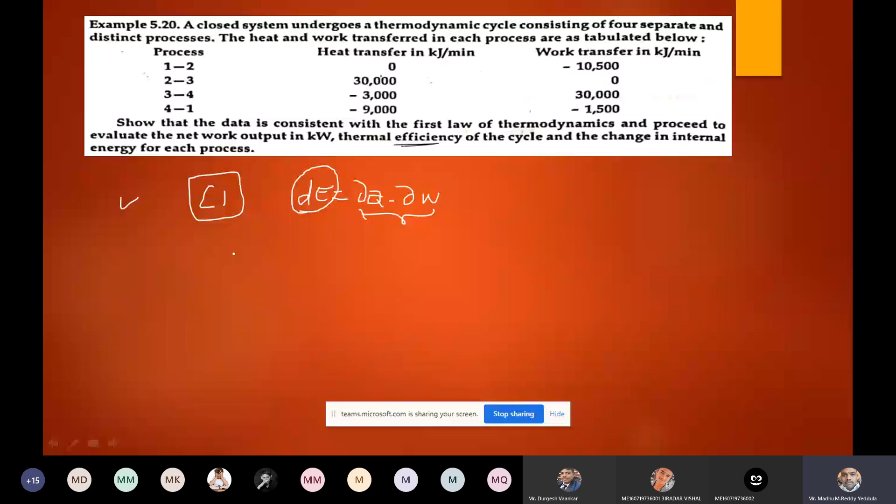Corollary two discusses isolated system. For isolated system, the change in energy dE is equal to 0. Nothing but energy is always constant, right? So for isolated system, there is no heat interaction and work interaction. Therefore, in the absence of heat and work, the net energy is always 0. The difference of energy, nothing but energy is always constant. That is corollary two we discussed.

Corollary three discusses perpetual motion machine of first kind, PMM1. It is a hypothetical machine. So what it states is, let us consider an engine. The input we are giving is 0, but I am getting output. Or there exists the same machine or engine where we are giving input, but output is 0. So this engine or machine violates first law of thermodynamics. Therefore, PMM1 is highly impossible.

In this case, it is an energy producing device. In this case, it is an energy consuming device. Therefore, we cannot.

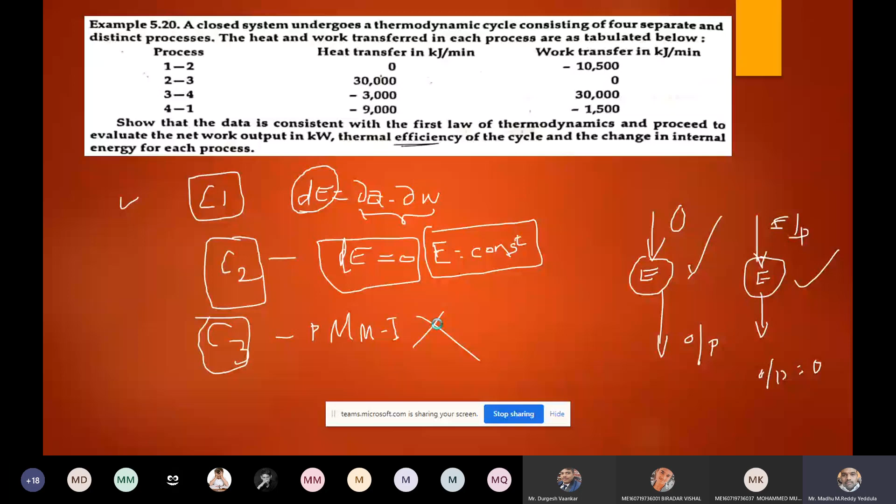So according to first law of thermodynamics, it is not possible to create energy or destroy energy. Therefore, PMM1 is a hypothetical machine, PMM1 is not possible. After that, we discussed two problems on the first law of thermodynamics.

After that, we discussed about stored energy. Stored energy is a property of a system. If you see in the figure, the system follows 1A2, and return it follows 2B1, 2C1, and 2D1. Irrespective of the path followed, again the system regains its original state, meaning the energy is independent of the path followed. It depends only on the end states. That is the reason energy is a property of a system.

Whatever energy it may be, the cyclic integral of energy, the cyclic integral of change in energy, is always 0. Cyclic integral of any property is nothing but a point function. All point functions are properties of the system. If a system undergoes a cyclic process, the cyclic integral of any property will be 0, including the cyclic integral of change in energy.

What is energy? Energy may be internal energy, kinetic energy, or potential energy. In the absence of kinetic energy and potential energy, our energy is equal to the internal energy. Almost all problems, wherever dE is there, I will simply replace with dU. That's what we discussed in the last class, right?

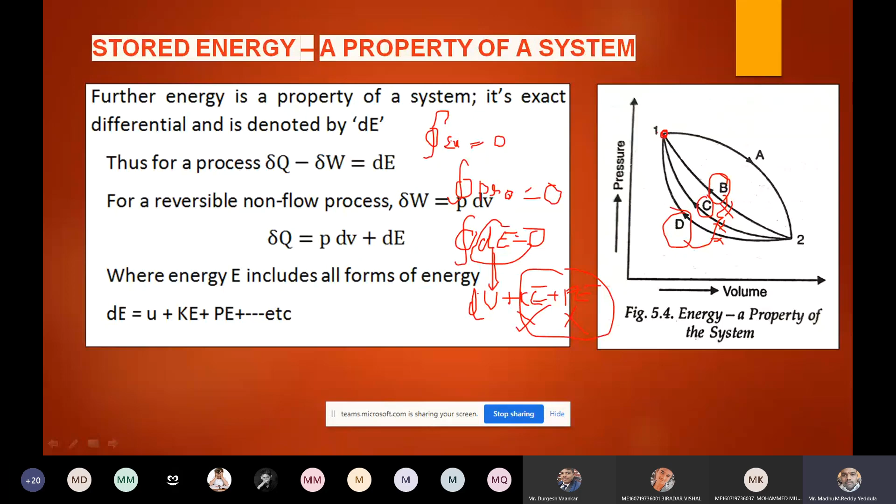Now, and we solved two problems over there.

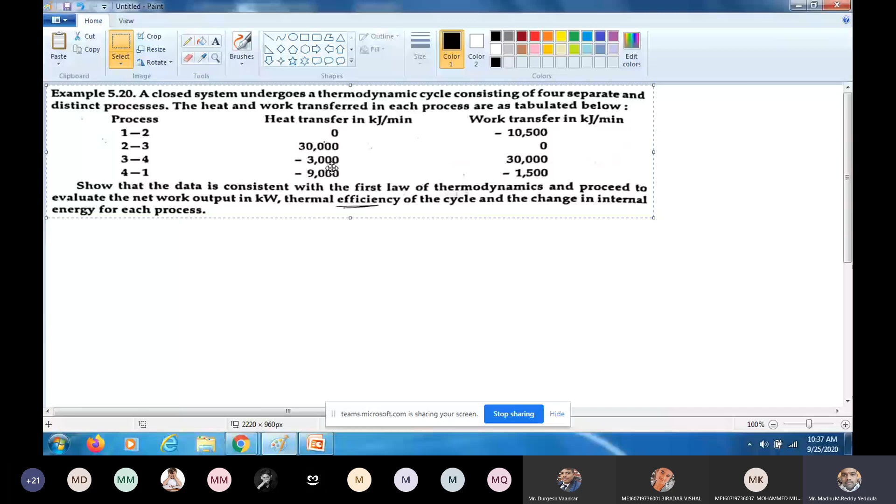A closed system undergoes a thermodynamic cycle consisting of 4 processes: process 1 to 2, 2 to 3, 3 to 4, 4 to 1. Let us assume it reaches its original state again through 1 to 2, 2 to 3, 3 to 4, 4 to 1. It is a cyclic process because again the initial state is restored. Let us assume this is P and this is V. Just for understanding sake, I've drawn the cyclic figure.

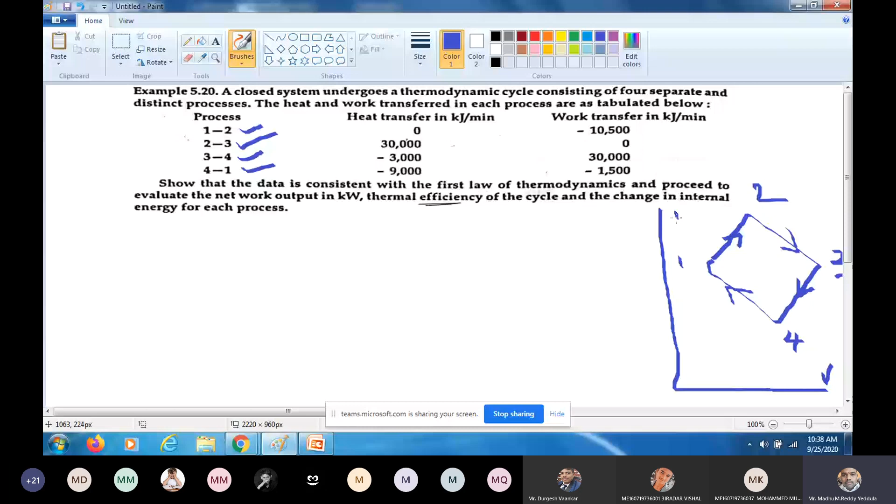So during 1 to 2, what is the heat transfer? During 1 to 2, heat transfer is 0, no heat is added to the system, and work transfer is minus 10,500. What is the meaning of minus 10,500? Can anyone please tell me? What is the meaning of negative sign in work transfer?

Can anyone tell, work done on the system? Yeah, work is done on the system, right? That is 1 to 2.

Now coming 2 to 3, during 2 to 3, the heat added is 30,000. It is positive, therefore 2 to 3, heat is added, and work done will be 0.

There is no work done, right? And 1 to 2, heat is nothing there, but work is done on the system because we got negative W.

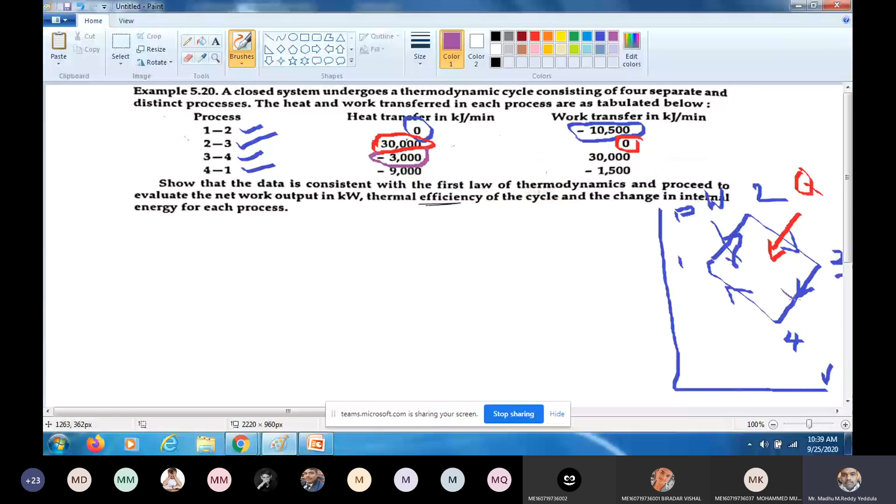Okay, now next, 3 to 4, heat is minus 3000, means heat is rejected from the system, right? So 3 to 4, heat rejected from the system because it is negative sign, and work is positive. Work is positive means work is done by the system. 3 to 4, work is done by the system.

Now coming to the fourth one, the heat is negative. Heat is negative means heat is rejected from the system. Q is negative and work is negative. Work is done on the system.

Is this process clear? What is happening - 1 to 2, 2 to 3, 3 to 4, 4 to 1, right? This sign plays a major role. Now we will see the question.

Show that the data is consistent with first law. So what to do in order to check that whether the given data is consistent with first law or not? What is the check we need to do? Tell me anyone, how to check whether the given data is consistent with the first law?

For first law, cyclic integral dou q should be equal to cyclic integral dou w. Agree? Yes or no? In order to satisfy the first law of thermodynamics, we need to check the cyclic integral of dou q should be equal to cyclic integral of dou w.

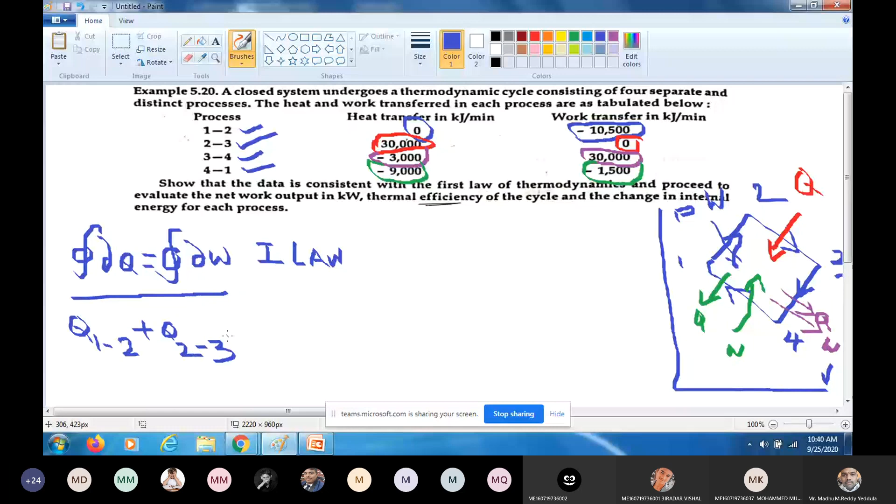Cyclic integral of dou q means q 1 to 2 plus q 2 to 3 plus q 3 to 4 plus q 4 to 1. Tell me, what is this value? Anyone? If you have a calculator, add all the data: 0, 30,000, minus 12, means it will be 18,000.

Positive, agree? Yes or no? It is 18,000 kilojoules per minute. That is the net heat. Clear now? This is cyclic integral dou q.

Now cyclic integral dou w means w 1 to 2 plus w 2 to 3 plus w 3 to 4 plus w 4 to 1. Now tell me, what is the sum of all the work interactions? Minus 12,000 plus 30,000, it is again equal to plus 18,000 kilojoules per minute. So cyclic integral dou q is equal to cyclic integral dou w.

What does it mean? The given data is consistent with the first law. Is it clear till first law? So we can say that the given data is consistent with the first law of thermodynamics. If it is clear, then tell me.

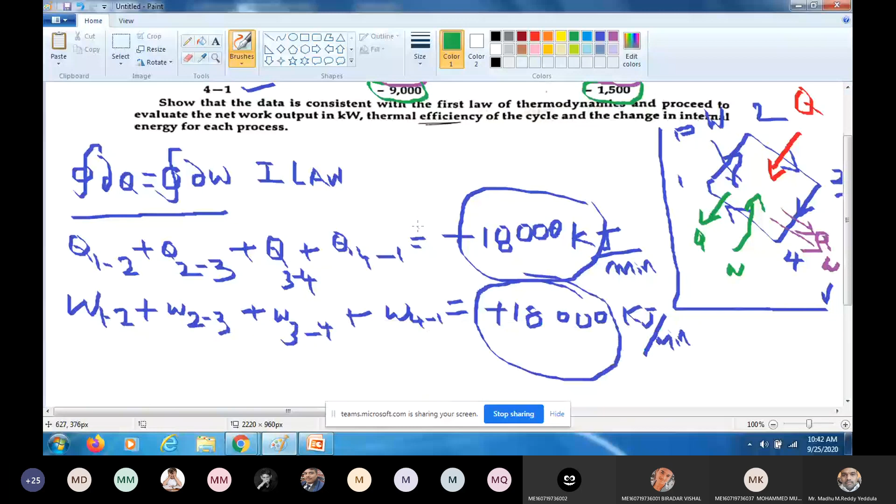Net work means cyclic integral dou w. Cyclic integral dou w, just now I calculated, and this value is positive 18,000 kilojoules per minute.

But I want in terms of what are the units he is asking? He is asking the units in kilowatt, right? So kilojoules per second is equal to kilowatt, right? In order to convert this, multiply. So what you need to do? How to convert kilojoules per minute into kilowatt? Please tell me anyone, hours - we should come to kilojoules per hour.

This is, no, kilojoules per second we require, right? So 1 minute is equal to 60 seconds. Already in the numerator we have kilojoule, right? So joules per second is watt, kilojoules per second is kilowatt. So therefore this value is equal to 300 kilowatt.

Is this conversion clear? How to convert kilojoules per minute into kilowatt, right? Just divide by 60, thereby you will get it in terms of kilowatt. Okay, this one.

This is second bit. Next, third bit, thermal efficiency, right? So thermal efficiency - always for anything, how to calculate efficiency? Not only engine, for any device, how to calculate efficiency? Please answer anyone, how to calculate efficiency of any device?

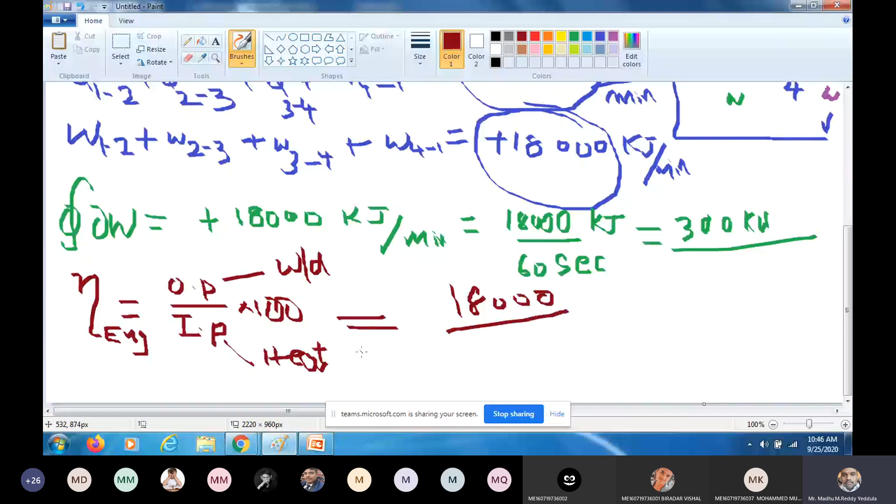Only heat supplied we need. Now how much should I substitute? Tell me heat supplied here. Is it 18,000? Please tell me heat supplied. No, 18,000 is not. That is the net heat.

Net heat is nothing but heat supplied minus heat rejected. Remember, net heat is different, heat supplied is different. Usually, net heat equals Q net equals heat supplied minus heat rejected. But I want only heat supplied. So this 18,000 is the net heat.

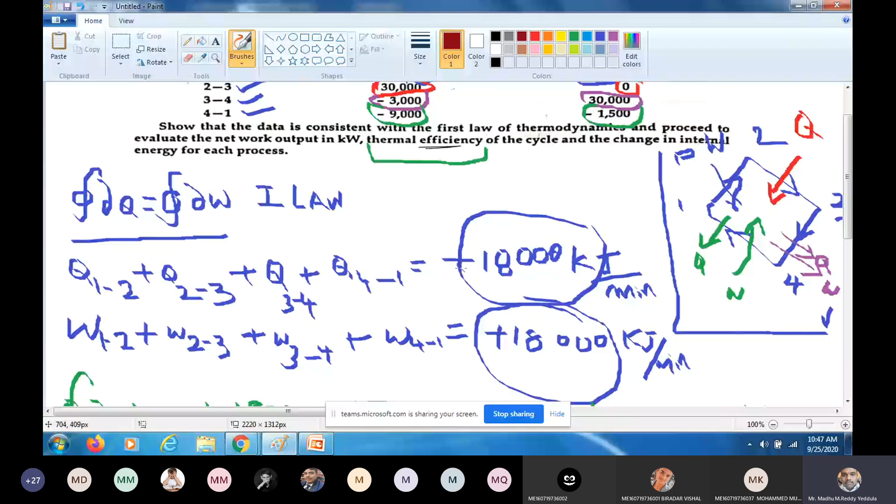This is the cyclic integral dou Q, this is the net heat. In this we have some heat supplied and heat rejected. If the sign is positive, that is the heat supplied. When the sign is negative, that is the heat rejected. So therefore, heat supplied is not 18,000, it's 30,000. 18,000 is the net heat, but positive sign is only for 30,000. That is the heat supplied. So work done will be net work, and heat supplied only heat supplied.

So this will give the efficiency. How much it will be? What is the efficiency here? 18 by 30 into 100. 0.6. 60%, right? 60%. Clear this bit?

So W net by heat supplied, that is the efficiency formula. W net means total work by only heat supplied. Net work by heat supplied gives the efficiency of any heat engine. Efficiency of any heat engine equals W net by heat supply.

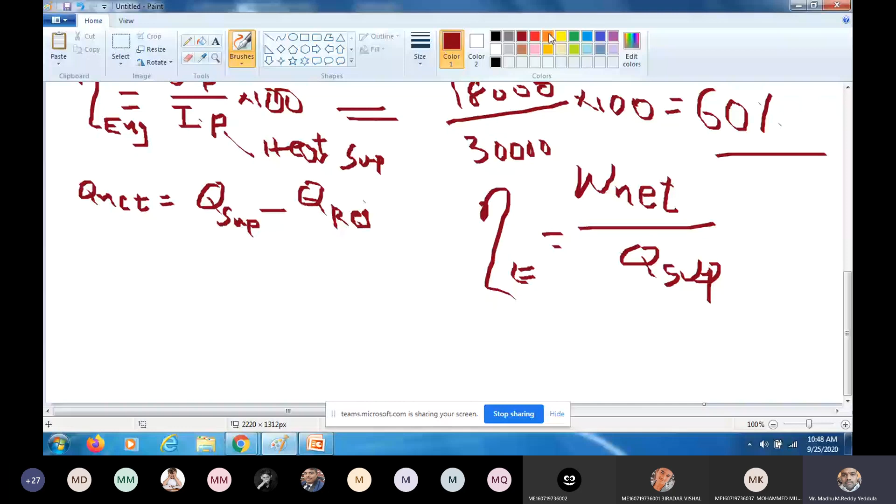Okay, the next part is asking thermal efficiency of the cycle and change in internal energy for each process. Change in internal energy for each process means for process 1 to 2, what is du? 2 to 3, 3 to 4, 4 to 1. So in order to do that, as we know from first law of thermodynamics or corollary, dou Q minus dou W equals du.

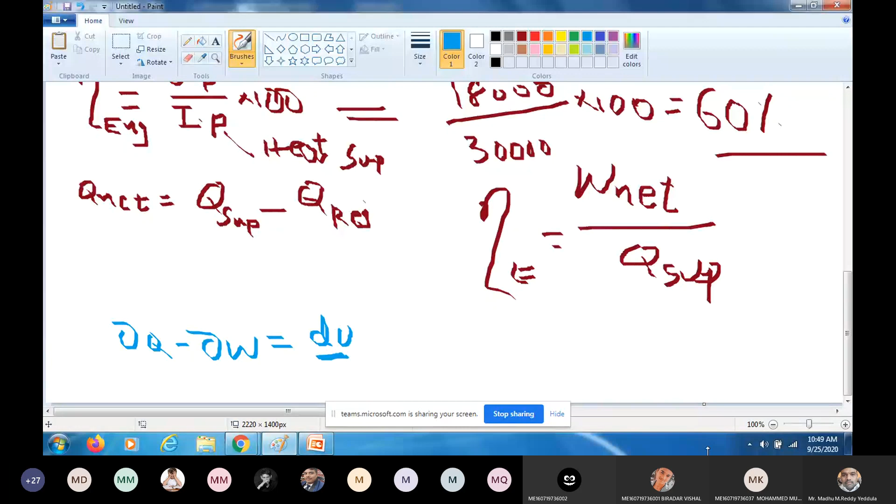Du is a property, also called a point function. Now he is asking du for each process: du 1 to 2, 2 to 3, 3 to 4. So I can say du 1 to 2 equals Q 1 to 2, minus W 1 to 2.

So what is Q1 to 2? Q1 to 2 is 0. W1 to 2 is minus 10,500. 0 minus of minus 10,500, so that equals 10,500 kilojoules per minute. So this is du1 to 2.

In the same way, we can calculate the internal energy during process 2 to 3. Can we do like this? Q2 to 3 minus W2 to 3, just substitute the values. And du3 to 4 and 4 to 1, four processes. Change in internal energy for four things. Du3 to 4 one process, and finally du4 to 1.

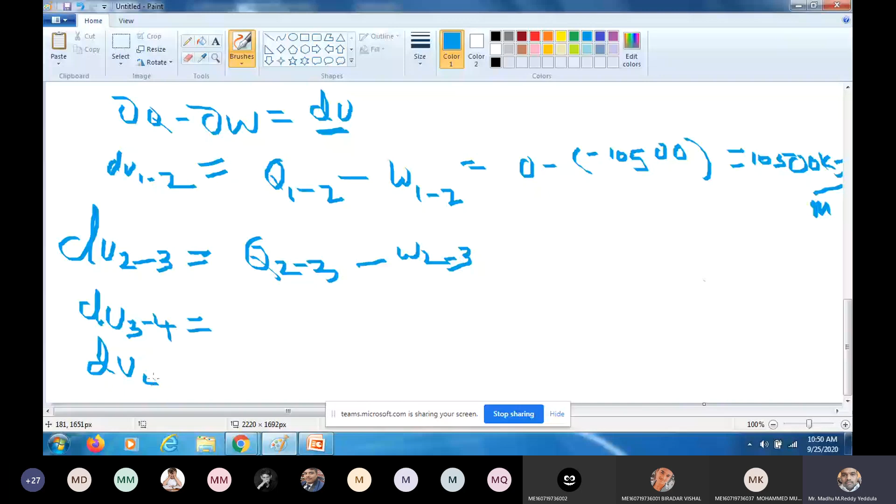Is this problem clear? First, we checked whether the data is consistent with the first law. For that, cyclic integral dou Q should be equal to dou W. We verified it is satisfied. Now, second bit is asking, first law of thermodynamics, proceed to calculate net work. Net work already we calculated, but units are in kilojoules per minute. But he is asking net work in kilowatt, so I need to convert this unit kilojoules per minute into kilowatt.

So for that, if I convert minute to second, kilojoules per second will be kilowatt. 1 minute is equivalent to 60 seconds. Therefore, kilojoules per second is nothing but kilowatt, and that is 300 kilowatt.

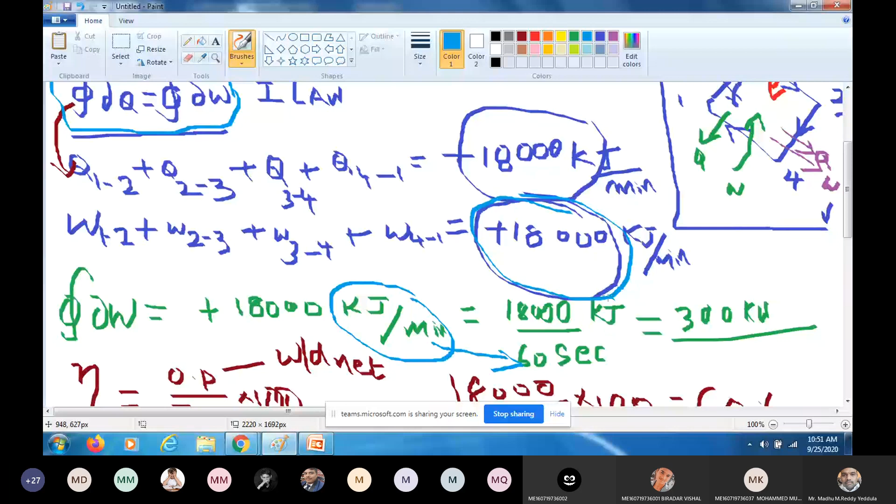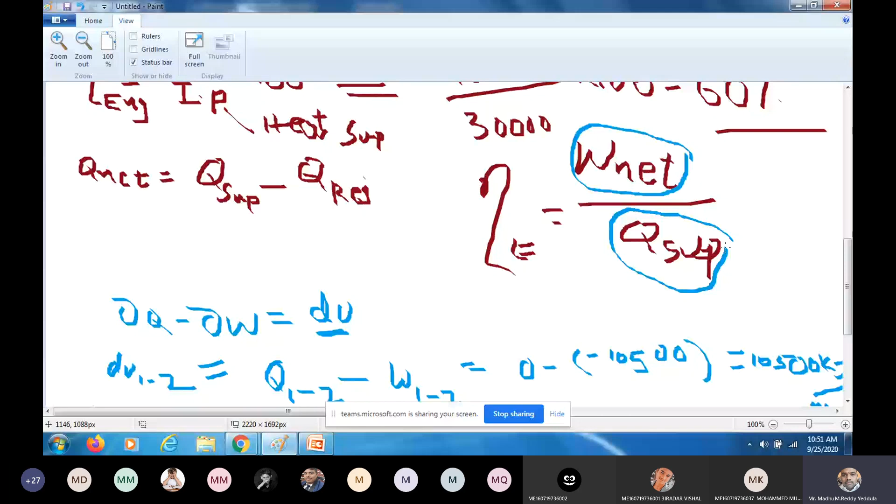Next, he is asking to calculate the thermal efficiency. Efficiency of any engine is equal to output by input, but to calculate thermal efficiency it is net work done by the system to the total heat supplied. Total heat supplied means only the positive sign values in the given problem. According to our sign convention, heat added to the system is positive. So total heat supplied is not 18,000, it is only 30,000 because it has a positive sign. So therefore we got the efficiency.

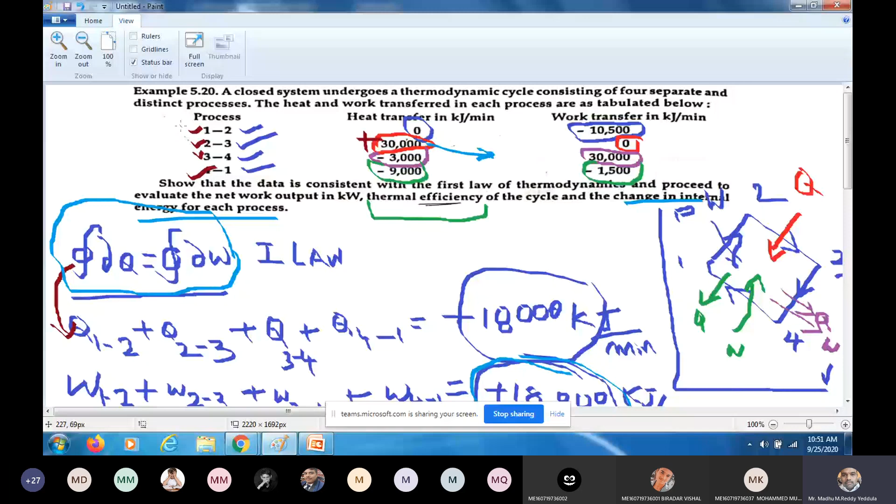Then he is asking for change in internal energy for each process. We have 4 processes, and for each we need to calculate change in internal energy: Du1-2, 2-3, 3-4, 4-1. As we know from the first corollary, there exists a property of a system such that the change in its value during the process is equal to the difference between heat supplied and work done. In the same way, Du1-2 equals Q1-2 minus W1-2, and similarly for 2-3, 3-4, and 4-1. Let me just write the values directly.

For 2-3, this will be 30,000 kilojoules per minute. And Du3-4 equals Q minus W, minus 3,000 minus 30,000, which gives minus 33,000 kilojoules per minute. Last one, Du4-1 equals Q4-1 minus W, minus 9,000 plus 1,500, which is minus 7,500 kilojoules per minute. This is the final answer.

Clear now? Clear or not? Yes, sir. Right, now we'll go to the next problem.

We can see here what I explained will be here, you can go through it quickly. If you have any doubt, you can ask me. Just go through it, verify here also: dQ is equal to dW. Yes, it is verified, according to the first law of thermodynamics. Next, he calculated net work output. This is dQ, and the unit is only the difference. We converted and got 300 kilowatts. Then the thermal efficiency, which is work done by heat supplied, 60%, and Du1-2, 2-3, 3-4.

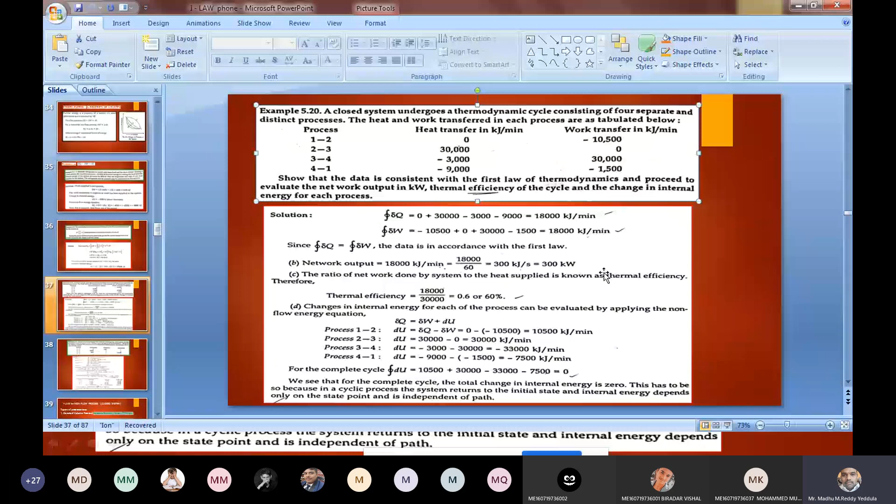Okay, again, I told you the cyclic integral of any property, right, so as I told, cyclic integral of any property. What is this value? Please tell me. Cyclic integral of any property will be 0 for a cyclic process. For a cyclic process, the cyclic integral of its change equals 0. We can check this too: cyclic integral of dU should be 0, then only our answer is correct.

There is no change in the energy right now. If dU is nothing but dE, in the absence of kinetic and potential energy, dU equals dE. When dE equals 0, what does it mean? E equals constant. When dU equals 0, E equals constant.

So here they check U1-2, 2-3, 3-4, and 4-1, and the value is 0. So we see that for the complete cycle, the total change in internal energy is 0. This has to be so because in a cyclic process, the system returns to the initial state, and internal energy depends only on the state point, and is independent of the path. Clear now? If you have any doubt about this last sentence, please ask me.

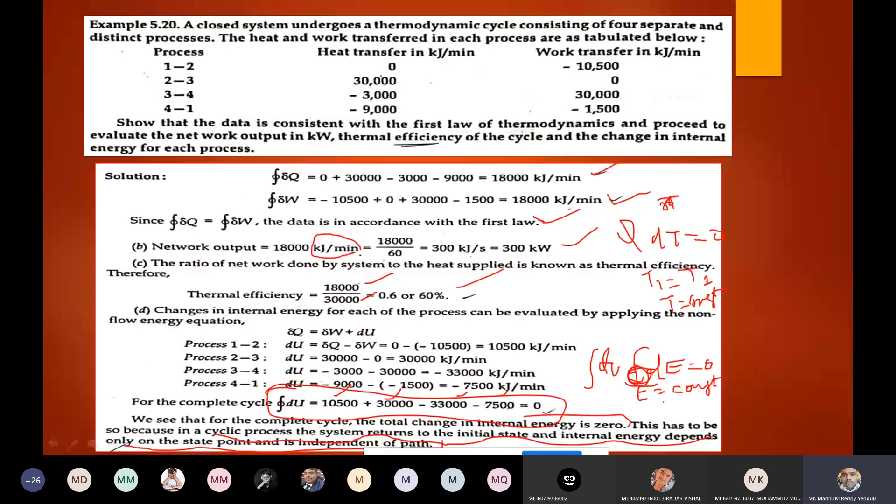Right, now next problem. A piston and cylinder machine contains a fluid system which passes through a complete cycle of 4 processes: 1 to 2, 2 to 3, 3 to 4, and 4 to 1. During a cycle, the sum of heat transfer...

Hello. Hello, sir. Sir, we can't hear you. Hello. Hello, sir, hello, hello sir, we can't hear you, hello, hello, wait. Hello, hello, the internet has gone. Hello. Hello, hello. Yes sir, hello, yes sir. Yeah, I think there's some internet problem. I think my, okay, yeah. Hey sir. Right.

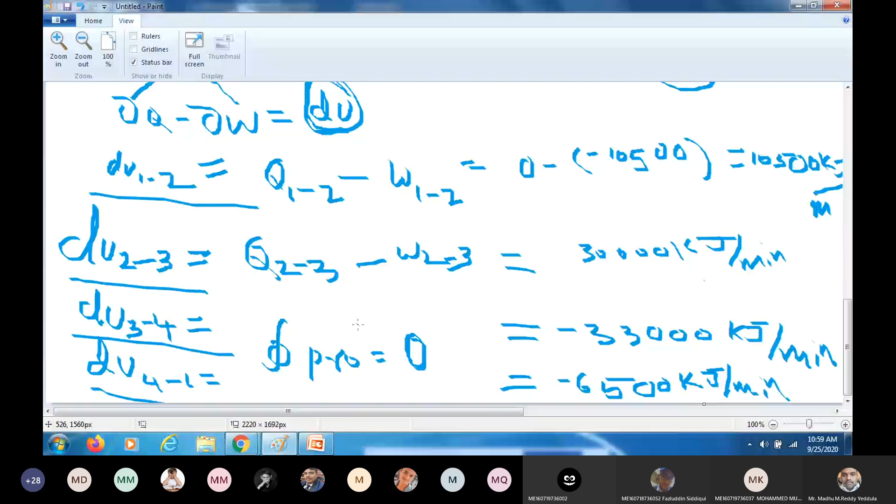Now, can you see the question on the paint? Can you see the question, sir? Right. We can see. Now here also same 4 processes are given.

What he is asking is first fill the table. Wherever dashes or dots are there, you need to write the data and calculate the net rate of work output.

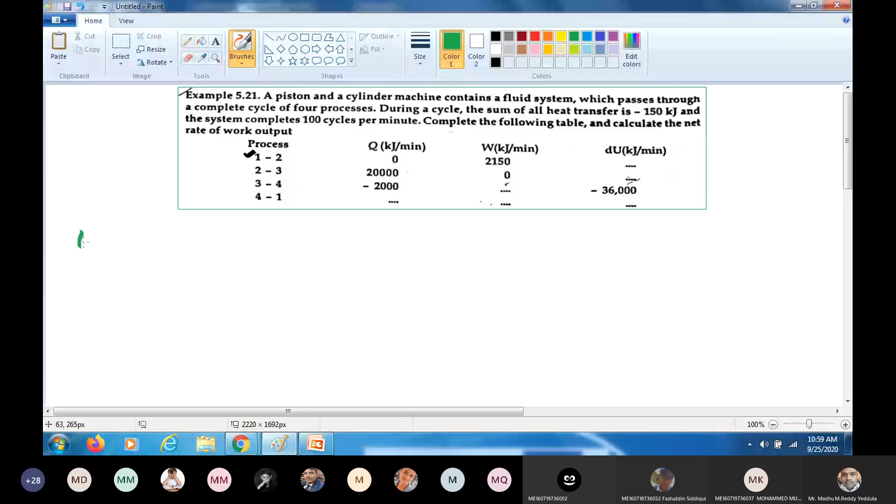Okay, right now, so 1 to 2. First we will go to 1 to 2. According to corollary 1, dE is equals to dou Q minus dou W. So because here 2 values are here, third value I can easily calculate, or not?

Please tell me. Yes sir. dE is nothing but what? du. In the absence of kinetic energy and potential energy, dE can be written as du.

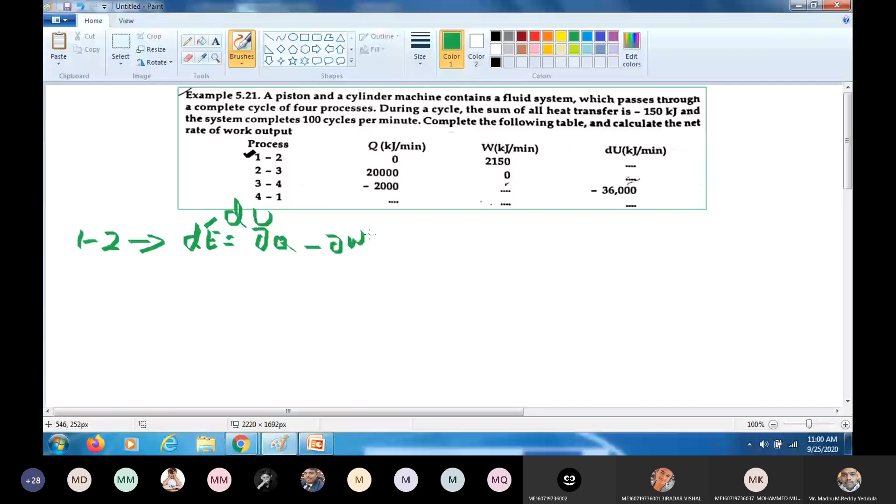So what is the value of dou Q? Q 1 to 2, this is 1 to 2. During 1 to 2, heat supplied is 0 minus work done is 2150. So what is the final value? Minus 2150 kilojoules per minute.

I have one question here. In this process, heat supplied is how much? During 1 to 2, heat supplied is 0. In that case, I'm getting du as minus. Can anyone tell me what is the meaning of minus? Du minus means what? Please answer. Very, very important.

Kindly mute your mics. Anyone can unmute and answer. Du negative means what? I will ask. No one will ask. All of you, please raise your hands, those who are active, those who are able to listen to my voice. Almost all are active. Still, I think nearly 10 members are idle.

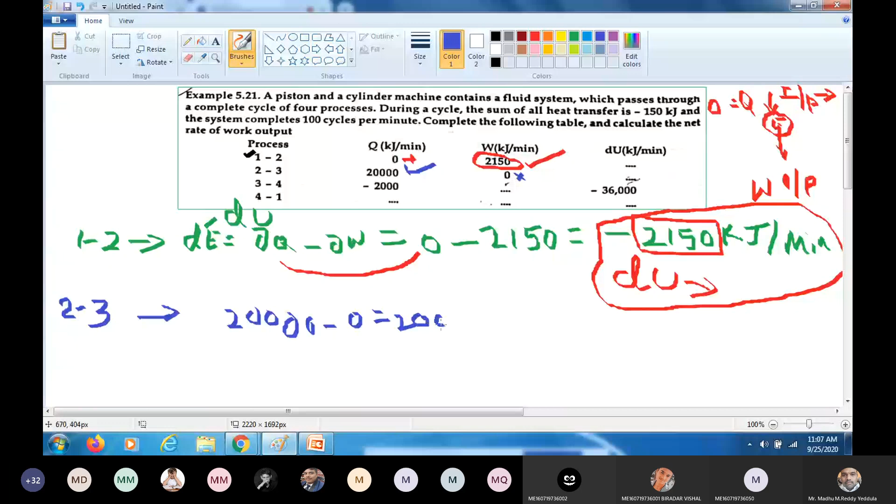Increase the internal energy, that is equals to dou Q minus dou W. 20,000 minus 0, so that equals 20,000 kilojoules per minute of internal energy increased. It is a positive value, dou Q minus dou W, positive or negative? Positive only. Therefore, in the absence of work done, the heat supplied is used to increase the internal energy of the body, right?

Now, 3 to 4. Du is equals to... sorry, right, heat supplied is negative. dQ minus 2000, means heat is rejected from the system and there is no work done. Minus W is equals to du is given minus 36,000. From this, can I calculate work done? Work done is equals to 34,000 kilojoules per minute. So work done is positive because work is done by the system. Is this clear? For process 3 to 4.

Heat is given and internal energy is given. And what is missing here? Work. So work done is equals to dou Q minus dE. Dou Q minus dE, minus 2000 plus 36,000, that will be 34,000 kilojoules per minute. Clear now, 3 to 4 process? Please tell me, 3 to 4 process is clear? Yes. In 3 to 4 process, in the table only work done is missing.

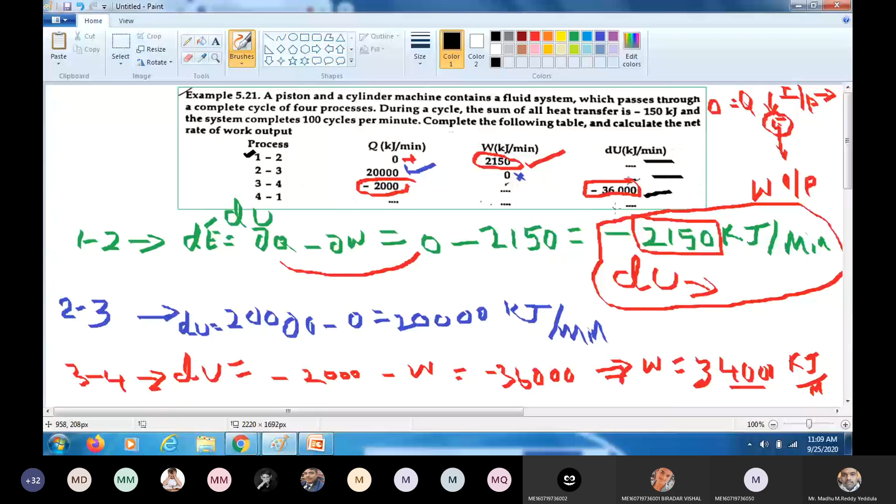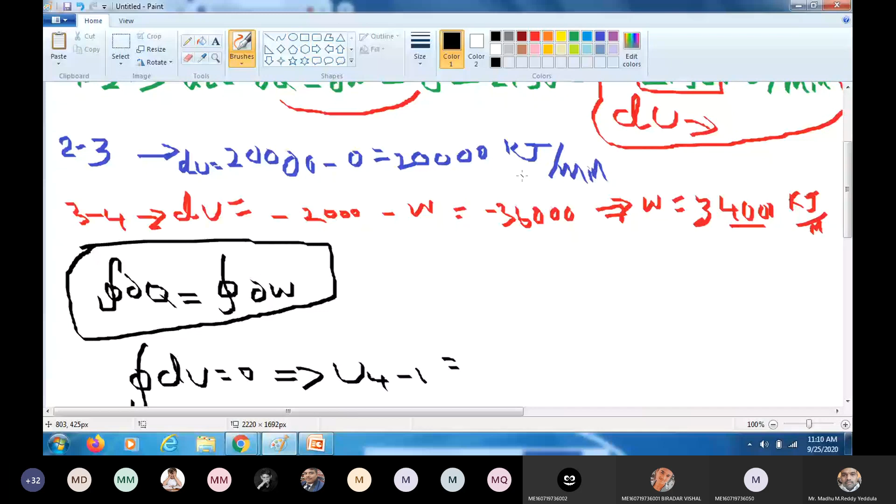From this we can calculate u 4 to 1. Once u 4 to 1 is known, please listen, once you know u 4 to 1, you can calculate heat in terms of work. We can calculate heat in terms of work, and by using this relation, we can calculate the missing values for 4 to 1. Is this problem clear? Yes, sir. Yeah, I will show you the solution also with values.

No, see, look here. Cyclic integral dou q, right? Now, so here usually this problem only, right? Yes, this one only. And here the process during heat transfer is minus 150 kilojoules per cycle during a cycle given. Like that, how many cycles are there? 100 cycles. Therefore, total heat is equals to minus 150 kilojoules per cycle. It is kilojoules per cycle and cycles per minute.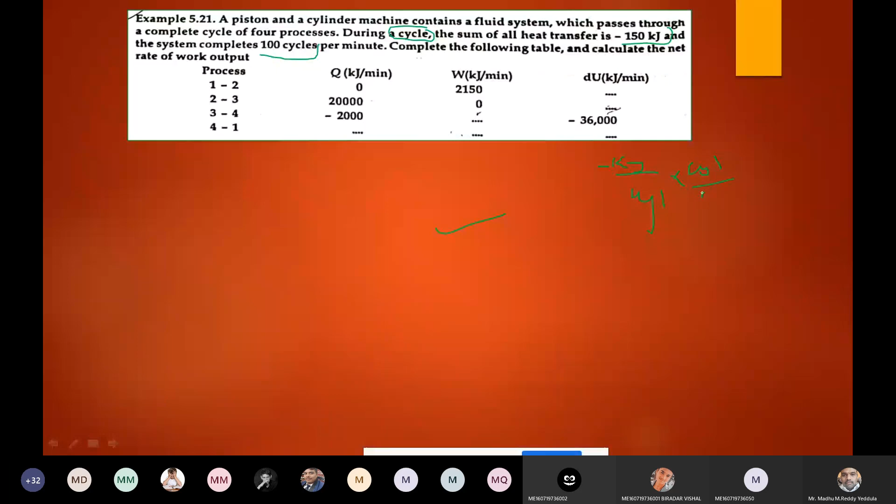So what will be cancelled? Cycle will be cancelled and we will get final units kilojoules per minute. Okay, that's the same thing here. So net heat we got minus 150. Minus 150 is the net heat, that is per cycle. Like that we are having 100 cycles. Okay, that is the net heat.

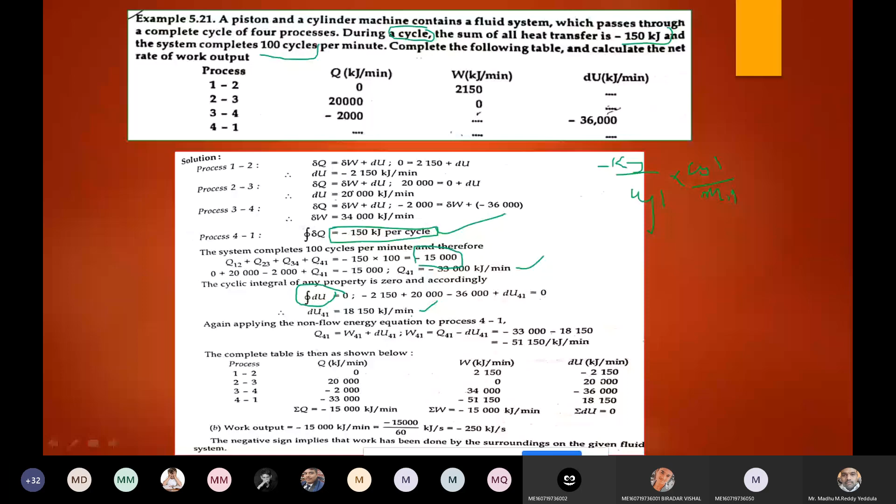From that we can calculate Q41 is missing. Okay, and by using the property cyclic integral du is equals to 0, we can calculate U41. Once you know U41 and Q41, we can calculate W41. W41 can be calculated once you know Q and U values. Okay, so that is the problem. Any doubt? Please tell me.

So finally, the work output is asking, right? Net work output is nothing but cyclic integral W. So if you see cyclic integral W value is negative, we got finally. Negative sign indicates that work is done on the system. Clear now? Any doubt you can ask me.

Sir, how is it Q41 as 150 kilojoules per cycle? Which one here? In the problem he mentioned, look here. During a cycle, the sum of heat transfers, cyclic integral Q, is minus 150 kilojoules per cycle. Like that, how many cycles are there? 100 cycles. Therefore, cyclic integral δQ value is given indirectly. Cyclic integral dou Q value is minus 15,000.

That is equals to Q12, 23, 34, 41. So we already calculated 12, 23, 34. The unknown value is 41. From this, we are calculating 41. Clear? Yes, sir. Right now, because Q12 is there, 23, 34 is there, and cyclic integral Q value is given, and 41 is unknown, this value we calculated first. Right now? Yes, sir, understood.